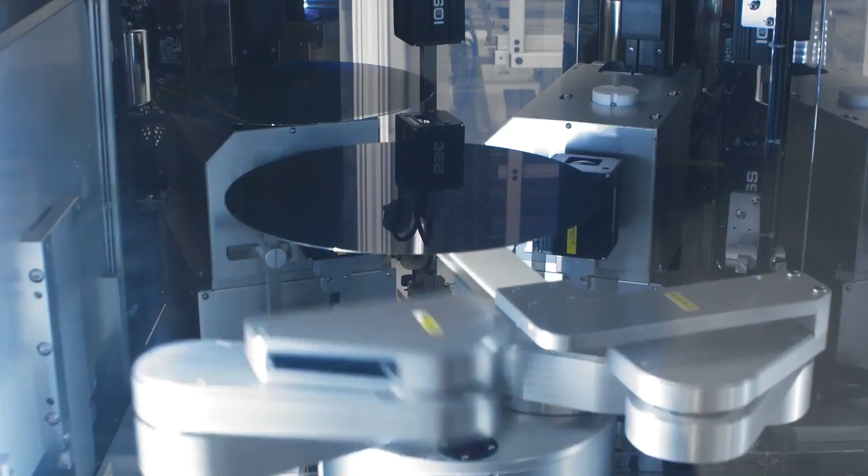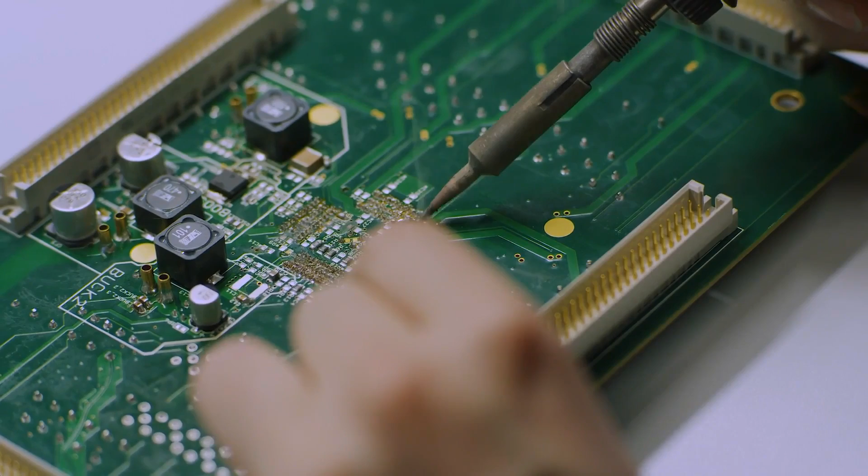Whatever the design, Infineon offers safe choice, easy design in, and reliable performance under various application conditions. We make these key requirements for our MOSFET product development. What does it take to ensure?

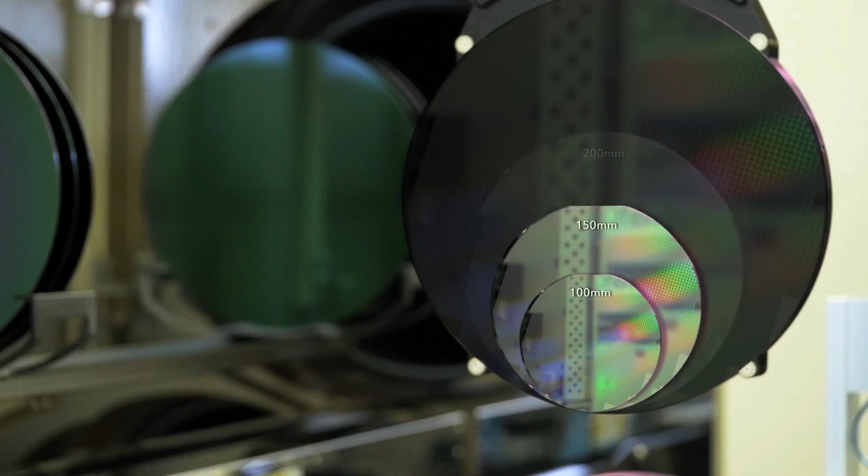Ease of use and easy to design in are key features for the customer, especially for the customers of the mass market, because they do not want to optimize their design for a dedicated MOSFET. We at Infineon have a long history in optimizing our FETs, especially to provide ease of use functionality. Either we do this by design or by the technology, or also by the package, and we see that we have meanwhile all the critical issues like overshoot and induced turn-on, which typically happens in applications, under control.

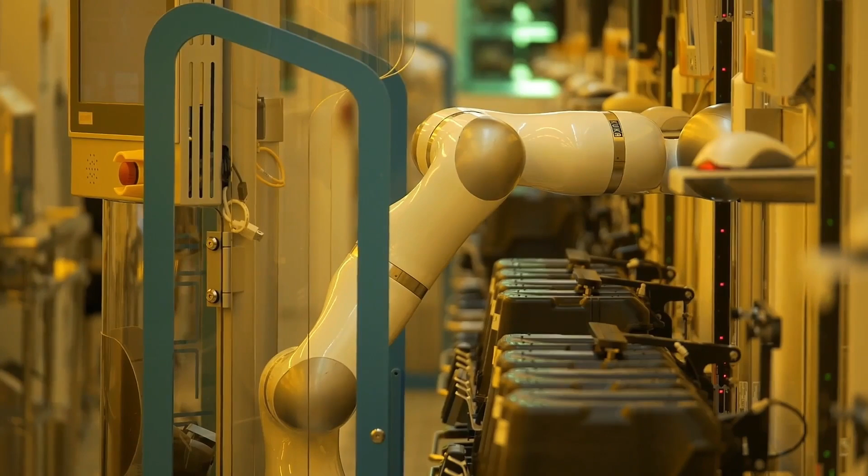As a trusted advisor, Infineon puts the success of its customers in the center of its product development. To ensure a competitive advantage for the customer, we need to differentiate with the MOSFET technology. Our MOSFETs are designed to operate at a very high switching frequency and at a very high current at the same time. So that means we provide a very high power density. And this gives the customer the ability to reduce the form factor and to have less cost in the application. We are part of today, and we are committed to remaining a part of tomorrow, also with our MOSFETs.

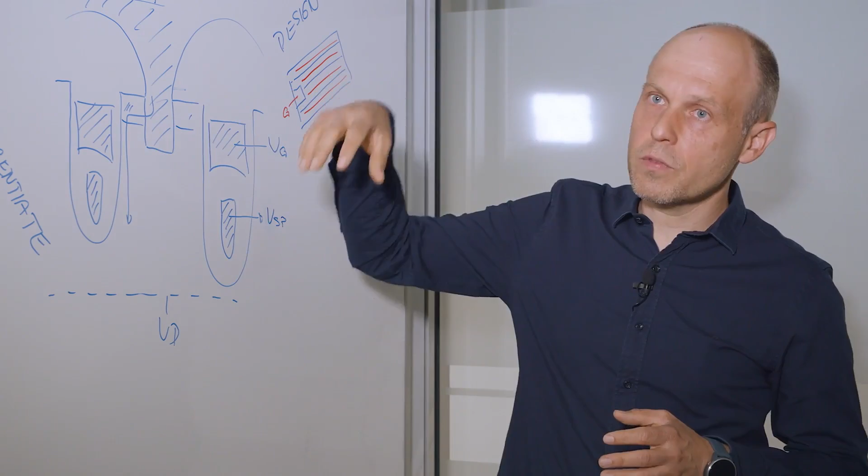So what does the future hold? Here I see two directions. The first direction goes towards another shrink. That means we go from lateral trench concept to harvesting into the third dimension. We also call it needle concept. And the other direction is go towards more integration. Provide additional features to the customer to differentiate, like a current sense, a temperature sense, or diodes. All in all, I see that our silicon MOSFET roadmap is very well stuffed.

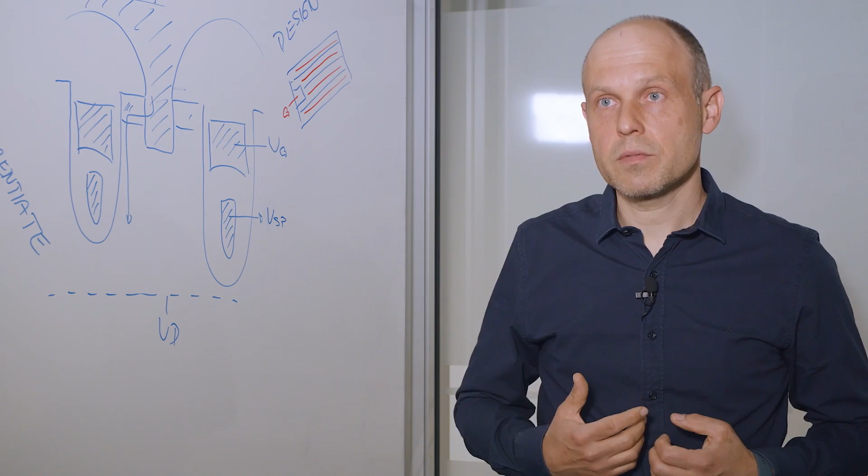Good evening to all. Myself, Shyam Kamal. And in today's discussion, I'm going to talk about arbitrary time stability and stabilization.

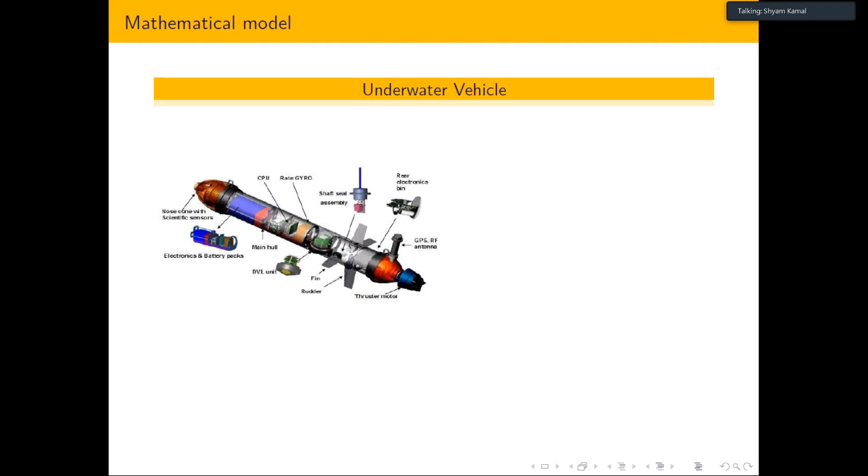Sometimes whenever we are trying to do something, the system is not available to us. Due to that reason, I need another platform that is called a mathematical platform. Mathematics gives us an abstract platform where we say this system can be represented by some mathematical equation. And that mathematical equation is simple from the control point of view. Obviously it should not be too simple.

So you can see here that I have an underwater vehicle. This is the physical system, and this is the abstract system. I am assuming that this underwater vehicle is moving in one direction, and I just have to control the velocity. I am not worrying about the position. What is our basic objective? I have to maintain some velocity Vd. Vd might be varying with respect to time or might be constant.

So I have a flow of water, and somewhere in between I have to stop the underwater vehicle, or we have to move the underwater vehicle with some specific velocity. This is the control objective. So I have written two problems, the tracking problem and the stabilization problem. Suppose in the flow I want to stop the underwater vehicle, meaning Vd equals 0, the velocity equals 0. That is called a stabilization problem.

Tracking means I have some sinusoidal velocity or constant velocity that I have to track. It is possible to show that in error coordinates, the tracking problem is converted into a stabilization problem. Not always, only if the desired signal is differentiable. Here I have just applied Newton's law to model this system, because I only move in one direction. Obviously this is not true if I want to move in any arbitrary direction.

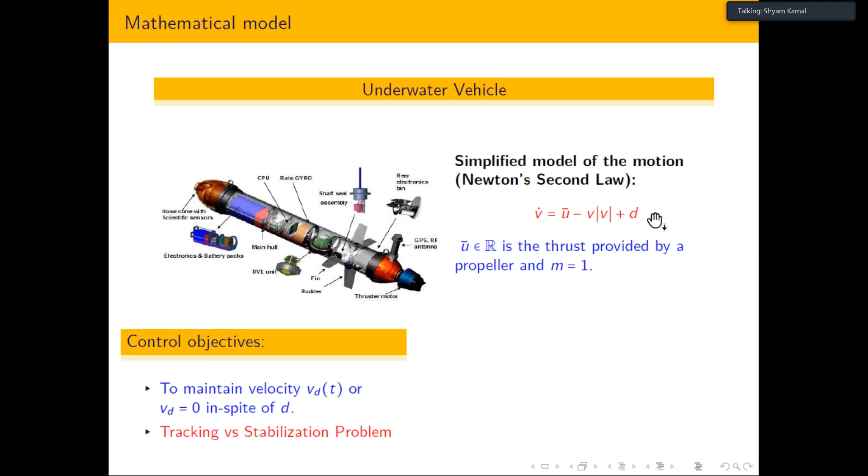And D is some uncertainty, because I cannot perfectly model any physical system. There is always some gap, and I have modeled that gap by D. What assumption do I have? The exact profile of D is not known to me, but I am assuming that D does not go beyond some maximum range. That is called the deterministic framework, and in that framework we are working.

If you see carefully, this system is a first order system in the velocity coordinate, and it is a non-linear system because V mod V is involved. Whenever I have a linear system, I have well-defined design tools. I can talk about rise time, settling time, or in the frequency domain, where the open loop or closed loop transfer function lies. But whenever we have a non-linear system, I cannot distinguish between transient and steady state response.

Due to that reason, I need some kind of qualitative behavior. I cannot talk about quantitative behavior. In case of linear systems, you can talk about quantitative behavior, meaning rise time, settling time, or these kind of things. That qualitative behavior is stability, accuracy, speed of response, robustness, and cost. In this lecture, I am going to cover these points: stability, accuracy and speed of response, and robustness.

Okay, so let us start with stability. Whenever I want to understand the concept of stability, those working on linear and nonlinear systems might have seen that whenever we talk about stability of linear systems, we use the bounded input, bounded output framework. But whenever we go for nonlinear systems, we talk about some other framework, either the ISS framework, input to state stability framework, or some kind of Lyapunov framework.

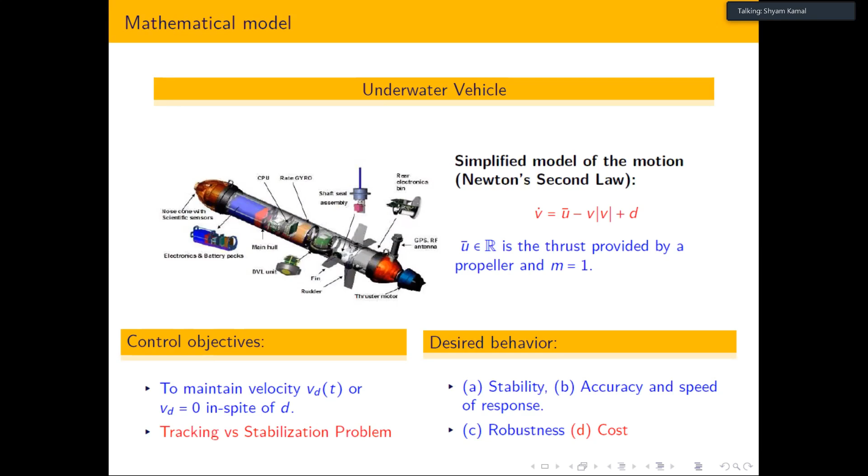So try to understand how basically that framework comes into picture. For that we have to understand why calculus works. First we have to understand how basically calculus is developed. If you see calculus, it is not a new subject. This is one kind of fancy linear algebra, you can tell. During school time, we have already explored linear algebra.

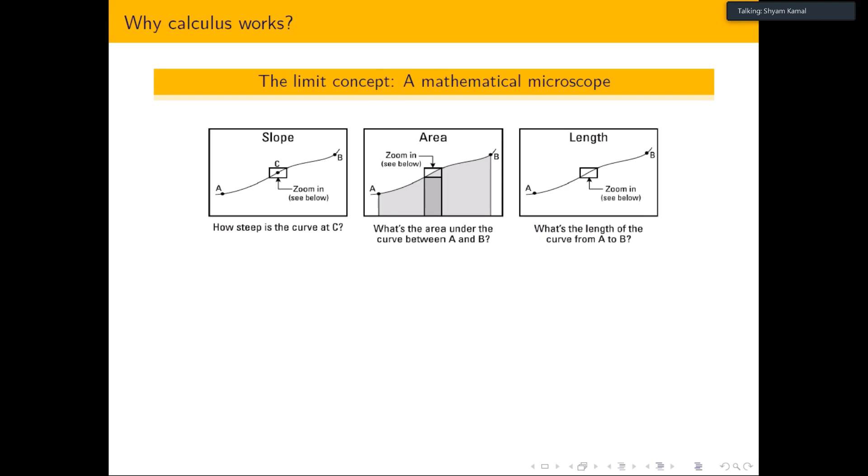So what basically we are doing: suppose I have some kind of slope that is constant slope, so I can calculate the constant slope by dividing the vertical height and the base. But here my problem is a little more difficult. The problem is that this slope is now no longer constant, it is varying every time. So now the question comes: how to calculate the slope?

Similar question here: if I have some kind of rectangle and triangle, then I can calculate the area. But suppose I have some kind of region which is actually varying from point A to B. Then how to calculate the area? And similar story about the length too.

So what is the suggestion of Leibniz or Newton? Actually it is debatable who has developed calculus, so I am not going into that prospect. I am just telling, suppose I assume calculus is developed by Newton, what actually Newton thought was that I have to apply linear algebra. So how to apply linear algebra? He was telling you can go to some point.

Suppose I am at this point C. Now you can apply some kind of microscope, and what you can do is start zooming. So if you do infinite zoom, then what happens? This becomes a straight line. And once this becomes a straight line, then you can apply linear algebra.

Similarly here, he was telling you can apply the microscope again, and using the microscope you start zooming. So if I zoom here at this particular point, then you can see that again the area is nothing but the addition of rectangle and triangle. So what I mean to say is that calculus is not a new subject, just some kind of fancy linear algebra, where one operation we have to understand, that is how to do zoom.

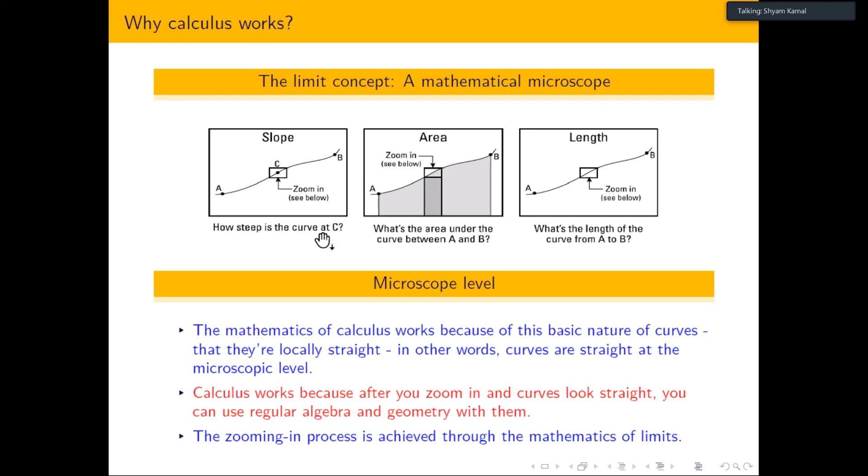Zooming is nothing but a mathematical microscope here. So I have to define the meaning of mathematical microscope, and for that Newton developed one concept called the concept of limit. If you see the concept of limit, it is exactly in the same way. First you see the definition, and after that we try to understand it. He is telling that suppose x is some independent variable and f(x) is the dependent variable, meaning you can interpret x as input and f(x) as output. So he was telling that as x tends towards a, if limit L exists, then for every epsilon there exists a delta such that this condition will satisfy. So if you read this definition, for engineers this definition is quite complicated.

In first reading, you may not understand why all this is written here, why it exists, but try to understand from a microscopic point of view. What is the basic idea? Calculus is nothing but some kind of fancy subject, so you have to do zooming. If you have to see a limit, you have to zoom here, stretch the curve here. And if you zoom, you can see that this point L is shifted from plus epsilon to minus epsilon. So now you can do any zoom, and due to that reason, this inverted A is called 'for all'.

And if limit exists, then there exists an independent variable L, and that is going to lie in some range delta. So corresponding to epsilon, since epsilon is independent, you can select any kind of zoom. So if you zoom the dependent variable, you get some kind of zooming of the independent variable. First you zoom the dependent variable, and if you get some kind of bounded region, then I can tell that there exists a limit. This absolute value means distance between this side and that side.

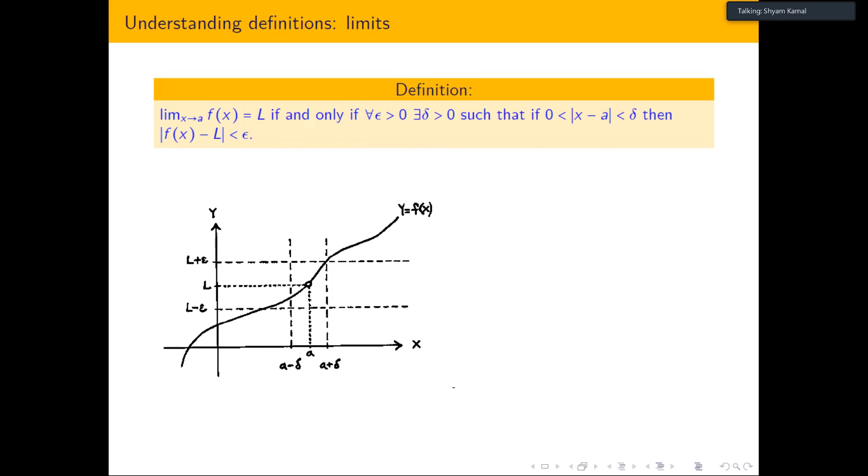It means you can now interpret something as a machine - you give some input and you get some kind of output. If this definition exists, it means that if I give bounded input locally, I will get bounded output locally. That is the meaning. Due to that reason, the stability definition is exactly the same, and due to that reason I have written here, continuity to stability.

So what they are telling is that I have some kind of system, and I have taken that system as x dot equal to f(x). Whenever you have a forced system, you have already designed some kind of control, and I am assuming initially that control is not a function of time. When control is a function of time, I will also give interpretation for that - only one more channel will increase in that case. So if you solve it, you can see the solution of this autonomous system - there is no extra variable, extra quantity involved here. So if you give initial condition to this system, you are going to get x(t).

So the definition of stability: for every epsilon, there exists a delta, exactly like the previous one. Here I am assuming that for the equilibrium point, x dot equal to f(x) is x equal to 0 is the equilibrium point. So a similar kind of definition - this kind of definition is adopted by Lyapunov, and this is called Lyapunov stability. So somehow Lyapunov stability is just the generalization of bounded input, bounded output, about the equilibrium point. That is the kind of message I want to transmit here.

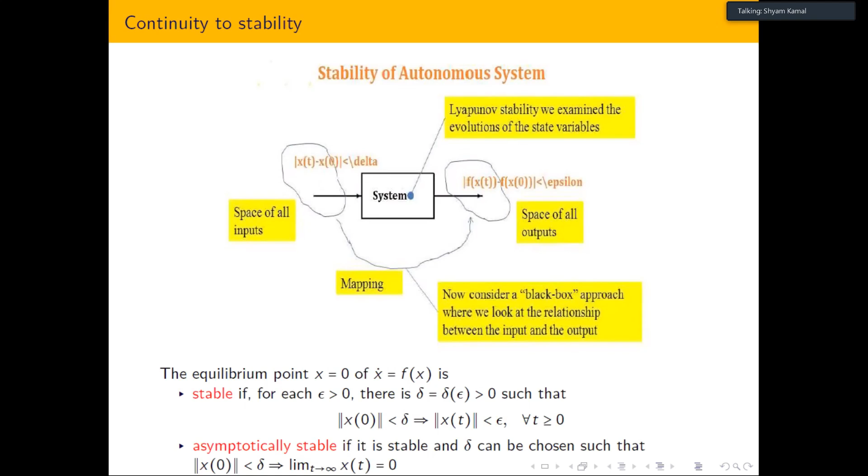Now let us come to the control part. I will also give another interpretation using Newton's law of how to understand stability. So one way, just by zooming, you can understand the notion of stability. Now what is the meaning of control? I have already told you that whenever I have some objective, I have to fulfill that objective. So how to fulfill that objective? I will see the current output and whatever objective I have to fulfill, and after that I will define the error between these two. Now what is our aim? I have to minimize that error.

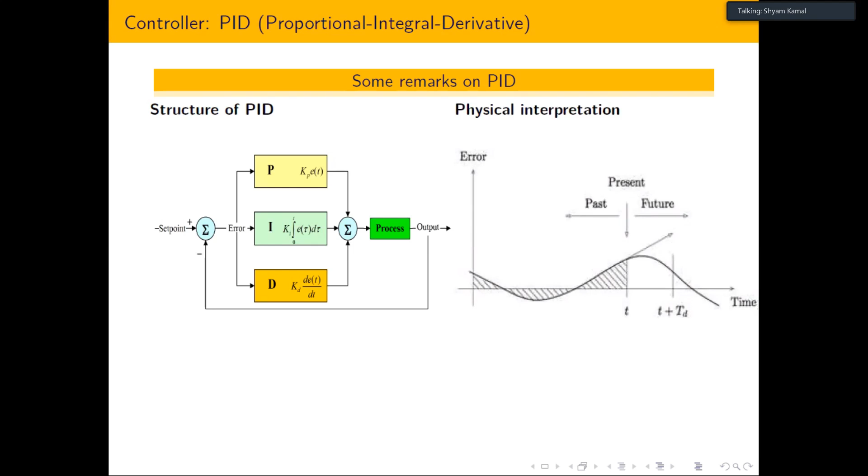Okay, so I have to nullify that error. Try to understand that I have some process, some kind of output, and some kind of set point. If the set point is 0, that is a stabilization problem. But suppose I have to track VD, then VD is the set point and V is the output of that particular underwater system. So what I am going to do is calculate the error.

And after that, you can see that in a PID controller we have listed 3 blocks. Let us try to understand the interpretation. Why only 3 blocks? Why not 4? Why not 2? So if you see our decision process, actually control system is fully motivated by our intuition.

Whenever I have some kind of situation and I have to take a decision, how basically are we taking that decision? We are seeing the present instant, the past, and the future instant. Based on the combination of present, past, and future, we are taking the decision. So similarly, here the machine is taking whatever we developed, we try to implement the same kind of methodology to the machine also. For that, we have used the idea of calculus.

So what calculus is telling us: I have some kind of error signal evolved with respect to time. The present error is represented by E. So I have scaled out that error, and after that we are actually supplying it to the system and telling the system to suppress this error.

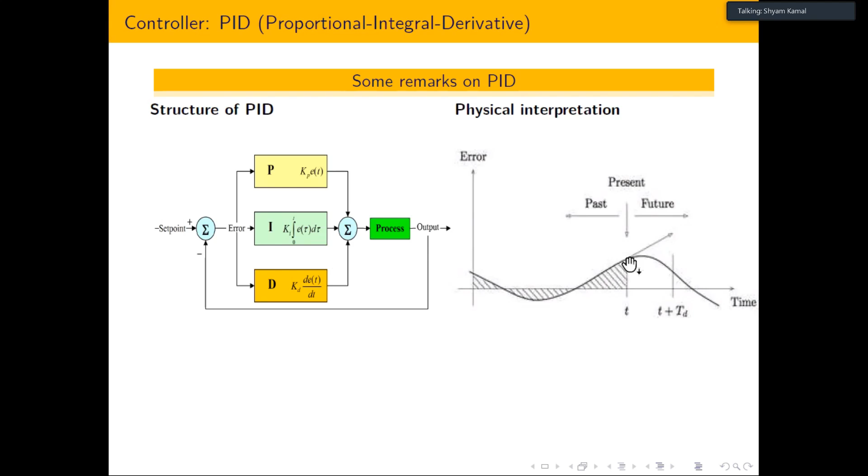Similarly, now our decision might be a function of the future, and due to that reason, you can see that future is nothing but the slope at this point. So basically, if you see the PID controller, that is nothing but 5 different things involved here: present, past, and future. Time is involved here, and after that, gains are involved.

Based on these 5 pieces of information, we are basically designing the control. And based on my knowledge, if you talk about any kind of control system, that is maximum based on these 5 pieces of information only. Sometimes it might be based on 1 information and 1 gain, that is okay, but most of the time we are just using these 5 pieces of information. Due to that reason, I am interpreting that the PID controller is a universal controller.

You can think of it like this: whatever controller I am going to design, that is just a subset inside the PID controller. So any controller you design is nothing but some kind of PID controller only. The only difference is that for this proportional term, you might use some kind of nonlinear scaling. In case of this simple integral, you might use some kind of complicated integral. In form of this simple derivative, you might use some kind of different derivative. So all controllers are nothing but subsets.

So if you have information of everything, then obviously your controller is very, very good. But nowadays, if you see the system, most systems are actually working under uncertainty conditions. So I cannot assume that I have future information and past information in order to design the control, because if I rely on past information, and suppose if I work on a network control system, some hacker will hack my information and change it. So our control itself will destroy our process.

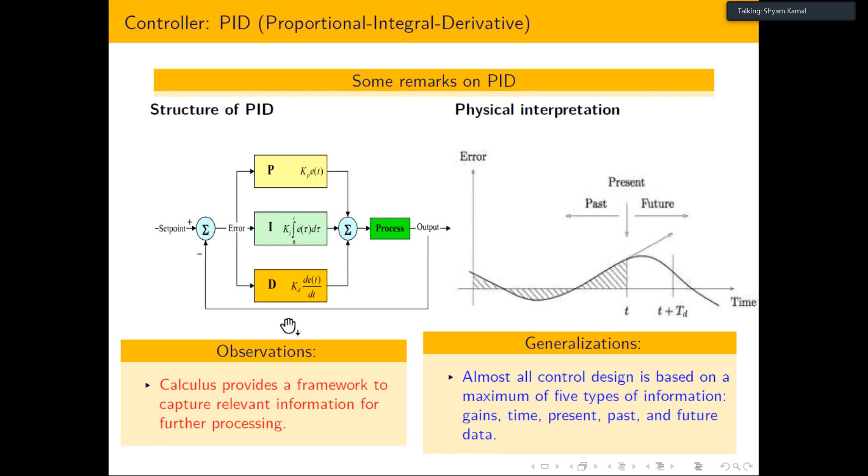So this is the brief overview of the PID controller and how basically the PID controller performs well, because we have all information, you can see. And due to that reason, the PID controller is simple, and if you are able to tune the gains, the PID controller most of the time gives you very, very good results. Okay, but what is the difficulty? I don't know the gains. I don't know the exact process. Okay, so if some process is running inside a closed room, what is my suggestion? You can use the PID controller.

Okay, let us try to understand now using this proportional information what is the meaning of equilibrium point, what is the meaning of asymptotic stability, what is the meaning of stability. Okay, so what I have done initially, if you remember the first slide, where I have taken the information of the underwater vehicle, at that time I have V mod V as a drag force, and I know that whenever some underwater vehicle moves inside water, drag force comes into picture. So I am interpreting that as a feed forward control.

But I am telling that whenever I am going to design some kind of control, I am going to add it in advance, because I know some kind of uncertainty is generated by this. So if you design this kind of control, then your closed loop system now just looks like this. Okay, so now what is our goal? I have to design u such that I am able to maintain V equal to 0. I am going to solve a stabilization problem. Means I have to stop the underwater vehicle somewhere. Initially, I am assuming that I have still water. Means there is no disturbance, that kind of thing.

So if you don't have any disturbance, and if you have just information of the present, I can design this kind of feedback. This is called negative feedback. The negative symbol is here, and we are trying to understand why Kp is greater than 0. Okay, so if you see the closed loop system after substituting this control, that is given like this. Now initially I have some velocity, and what is our aim? I have to make velocity equal to 0. I have to stop. That is the basic idea of a stabilization problem.

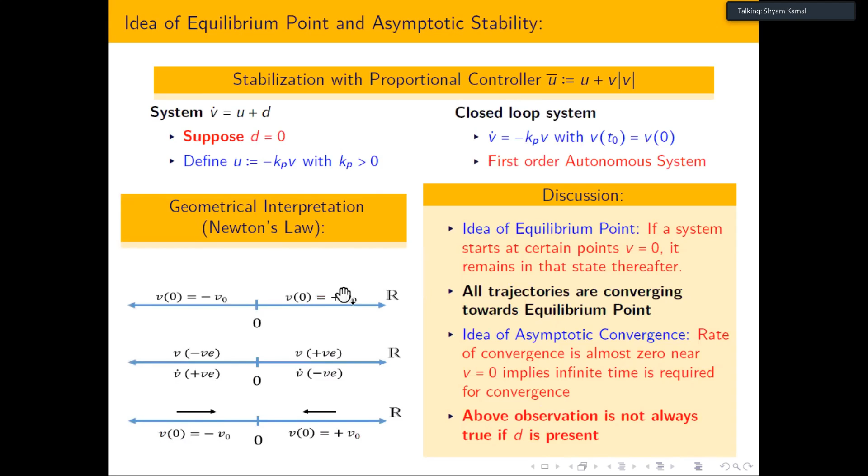So now you can see how to define stability: if you start near the equilibrium point, you are going to remain near it. Stability is nothing but boundedness of the state trajectory. What is the meaning of asymptotic convergence? You are not only going to remain inside this ball, you are also going to converge to zero. If I start from here, I remain inside some ball and then converge here. So asymptotic stability requires boundedness plus convergence to the origin. After that, what is the meaning of exponential stability?

I have bounded, but I have a rate of convergence, meaning exponentially fast speed, because whenever we are talking about asymptotic stability, we are not talking about a speed of convergence. But in case of exponential stability, we are also talking about the speed of convergence.

And due to this reason, if you see the literature, we first have the idea of an equilibrium point, because that is only one point in a space. If you start from that point, you are going to stay there. So that is a very, very unique point. Now what you can do about that point, you can check the behavior. So you are going to talk about stability, asymptotic stability, exponential stability.

For linear systems, everything is very, very simple. But for nonlinear systems, I can only talk about stability of the equilibrium point. I cannot talk about stability of the whole system, because it is possible I have more than one equilibrium point.

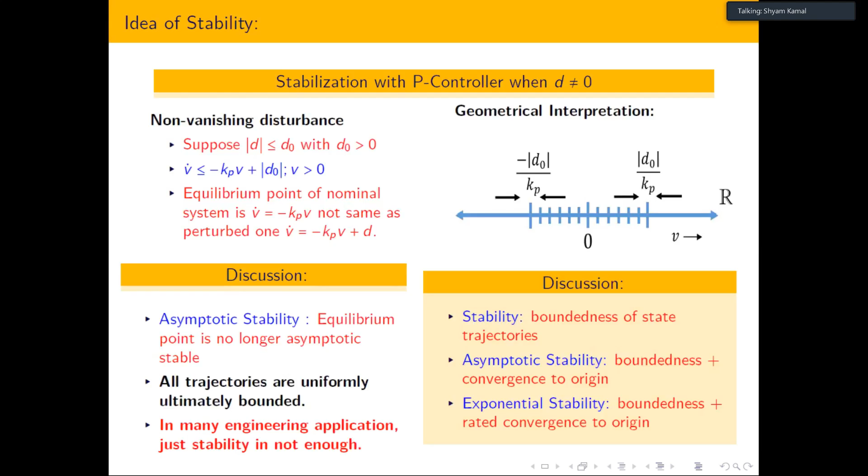Now you can perform the same experiment inside water. You can put this cart inside the water, and I am assuming that I have some kind of ground filled with water. So one more friction force starts acting, that is called viscous friction force, and its value is V squared. We have already seen that whenever an underwater vehicle moves inside water, that is V mod V. So either you can write V mod V or you can write V squared signum V.

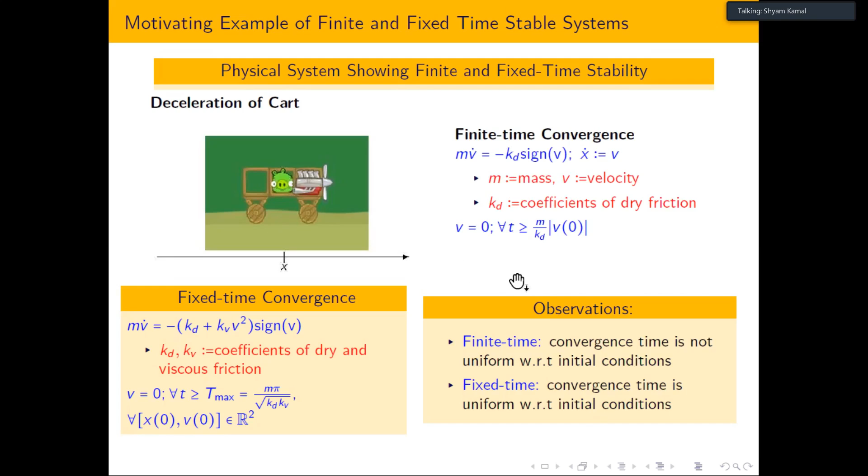So the observation is that convergence time is not uniform with respect to initial condition in finite time stability. In fixed time stability, convergence time is uniform with respect to initial condition. These two examples motivate new kinds of stability called finite time stability and fixed time stability. Suppose you have a first order system, and if you design control like this using the signum function, it is possible to show you will get finite time convergence. I will show this using Newton's law in the next slide.

Now, one question comes to mind: is it possible to create a differential equation where the time of convergence is independent of the system parameters as well as the velocity? Suppose that you have some kind of enemy, and you have some kind of defense system, and you want to hit this enemy.

So the enemy might possibly be located anywhere, but you have just a very short time to hit that enemy. So at that time, if your time of convergence is a function of a parameter or initial velocity, then you are not able to hit that. And due to that reason, I need another form of stability that is called arbitrary time stability or free will arbitrary time stability. It means that it is independent of the initial condition as well as the initial parameter.

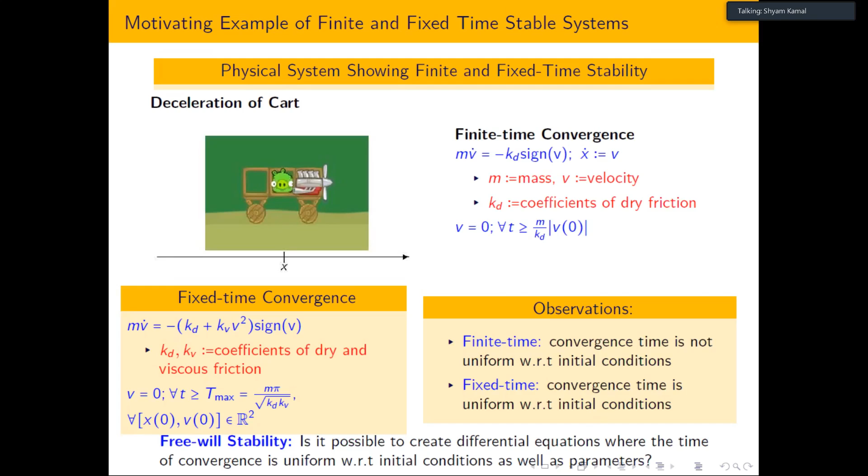Okay, so I have done some simulation in MATLAB. What I have done, I have taken a very, very simple system, x dot equal to u(t). After that, u(t) I have designed based on proportional information. u(t), I have just kept minus x(t). You can see that if I start with any initial condition, again, I am going to converge. And this is asymptotic here.

After that, I have updated my control like signum x(t). Okay, so it is possible to show that x(t) equal to 0 as t greater than or equal to mod x0. So if I start from 2, you can see that within 2 seconds, I'll end up here. If you start from 5, within 5 seconds, I'll end up here.

Okay, after that, again, I have actually done a more complicated control. And if I apply this kind of control, it is possible to show that if t greater than or equal to pi, it means that if I start with any initial condition, so t greater than or equal to pi, 3.14, so maximum 3.14 seconds I am going to converge. But I cannot tell exactly when I will converge, I can only give the upper bound. But what is the beauty of free will arbitrary time stabilization? You can specify the time.

You can see here that I have taken initial conditions 2 and 5, and I want to design some kind of control so that within 1 second, I can land on our target, land at x equal to 0. Okay. So it is possible to show that using both initial conditions, exactly at the same time, I can land. But you can see that the control algorithm is more complicated, and that is also depending on the time. Okay. So basically, this is time varying control. Our whole system is a non-autonomous system. Okay. So this is a comparison of the 4 different kinds of stability.

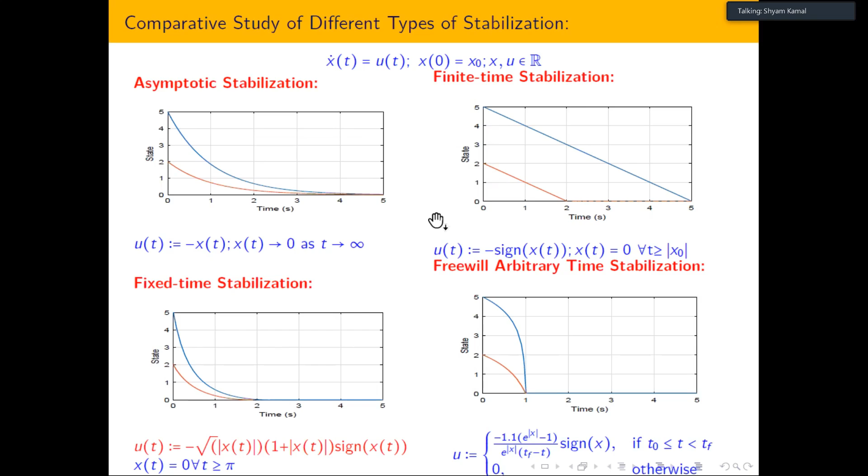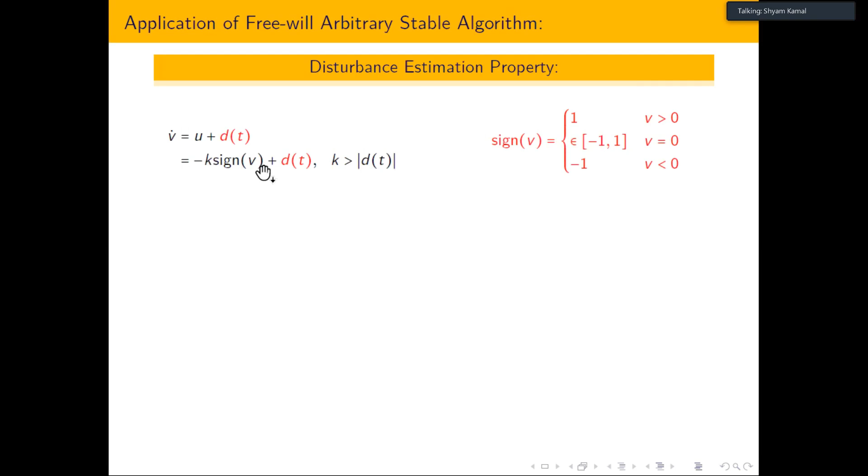Now let us try to see why this kind of stability is required. So again, I am going to take the example of the same system. I am assuming that I have applied control U bar such that whatever damping force is actually compensated. After that, this is my closed loop system. Now what I am going to do, I am going to understand the on-off control based on Newton's law. So the signum function, you can see that I have defined in a different way. What I am telling is that at V equal to 0, it lies from -1 to 1. So I am going to give you the intuition using Newton's idea only.

Okay, so let us try to see here again. If V greater than 0, I am assuming that V belongs to R. I have just one direction of velocity. So in place of X, please interpret here V. Okay, so what I am telling is that V, if that is positive, so V greater than 0 means +1. So I have some value of gain. And I have selected the gain greater than the maximum absolute value of the disturbance. So suppose the disturbance is lying between -10 to 10. So I have selected a gain that is greater than that.

So always if you see V greater than 0, V dot is some kind of constant value. Some constant value is going to be generated here. Okay. And due to that reason, the direction is in this direction, but the rate of change is also some number that is never very close to 0. Now you have to move from city A to city B. And if your velocity is finite, even if that is very small, in finite time you are able to move. So due to that reason, if you apply this kind of control, it is possible to show that you can move in finite time. Okay, same kind of information, V1 I have taken and d(t) sin t I have taken. So within finite time, I will converge here. Okay, after that, we have actually done one more simulation.

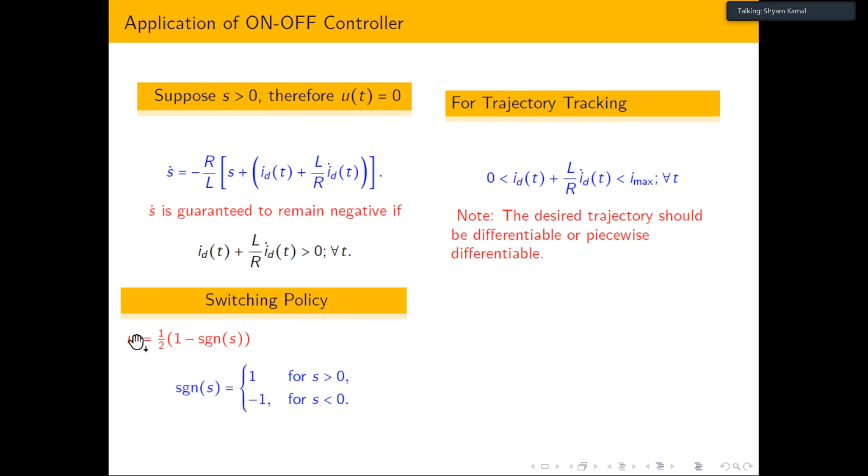So overall, if you maintain this kind of condition, I have to switch between these two, either plus or minus. So I have to design signum S, with S greater than 0 as plus 1 and S less than 0 as minus 1. So you can see here, if you put S greater than 0, 1 minus 1, so U equals 0. So if S is greater than 0, then U(t) equals 0. If S is less than 0, minus 1, that is plus 1.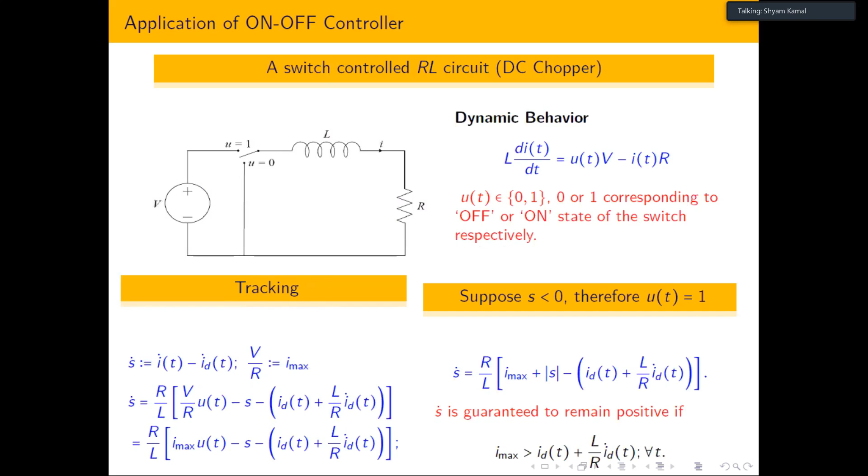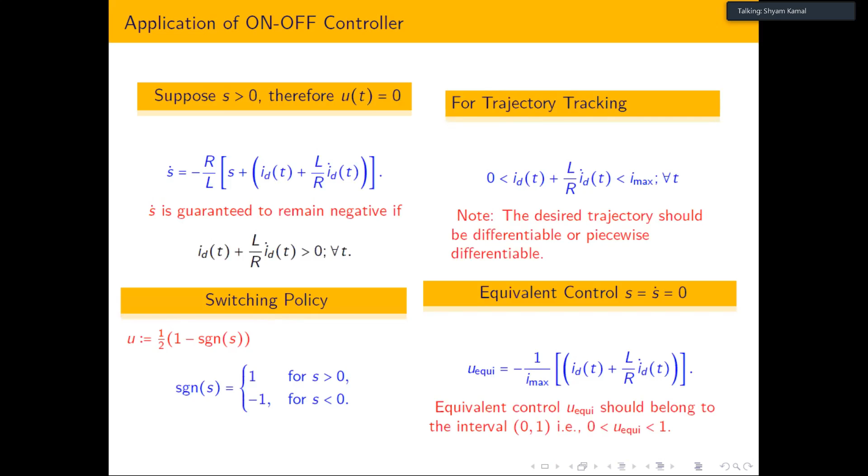In this way, whenever I have some kind of power electronics circuit, we only have to control the time of execution of this particular switch. By controlling this, I am able to maintain either a specific voltage or a specific current. So in this way, we are implementing sliding mode control or on-off control to the power electronics circuit. Similarly, you can implement free will also.

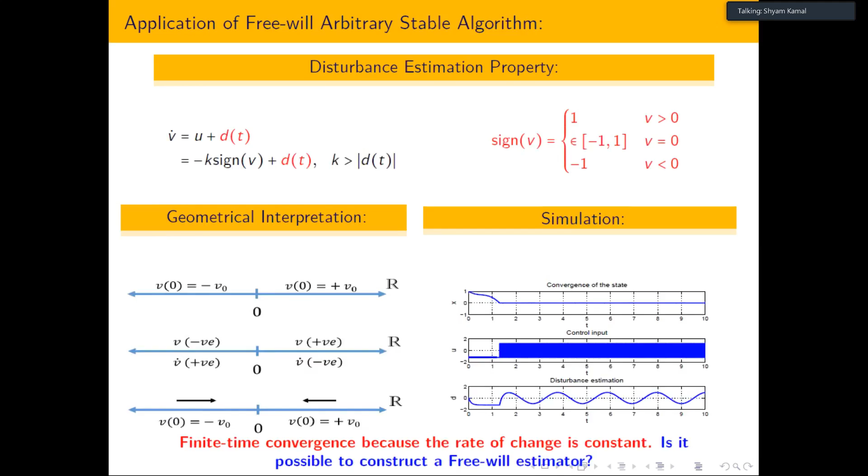Okay. Now, what we have seen in this slide is that if I have just on-off control, then I have to wait a long time to converge somewhere. I cannot control the time of convergence. But what is our goal? I want to control it arbitrarily. And due to that reason, now I am going to move towards a new definition.

So what I am saying is, during simulation we found that if the right-hand side is time varying, then I can talk about a class of systems whose convergence time can be tuned in any arbitrary way. Whatever control I am going to propose is a function of time, a function of x, and tau a you can specify. Whatever time of convergence you want, you can give inside the controller, and you have to give the gain part.

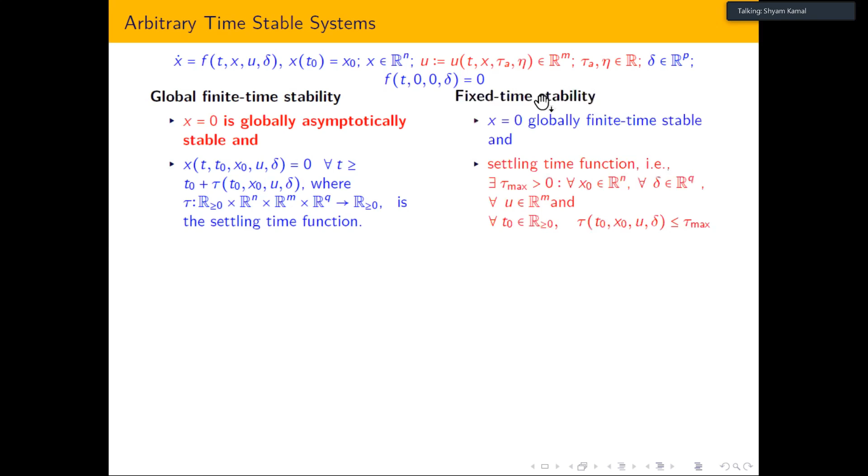And you have to make sure that this gain is greater than the order of the system. If you have a first order system, then this eta should be greater than 1. If a second order system, then greater than 2. Similar like that. So this is the definition of global finite time stability.

The meaning of global finite time stability is that x equal to 0 is asymptotically stable, and after that you have to maintain t. And here you can see that the time of convergence is a function of initial time, initial state, u and delta. But what is the meaning of free will arbitrary time? That you can tune tau a based on the convenience of your system. In fixed time stability, you can't tune your time of convergence. That is the limitation.

So this is the definition of free will arbitrary time stable. What we are saying is that the system is obviously fixed time stable. Fixed time stable means the time of convergence is upper bounded by tau max. And after that, tau A, whatever time of convergence you select, is independent of system parameters or any a priori known parameter. You just have to tune one parameter, even if you have an nth order system.

And if you are able to tune exactly, then that is called free will strong arbitrary time stable. Due to several implementation errors, sometimes we are not able to tune exactly, but it is in the vicinity of that, and due to that reason tau A is greater than or equal to tau TF. So this is called prescribed time and this is called predefined time. So arbitrary time stability is actually a collection of both.

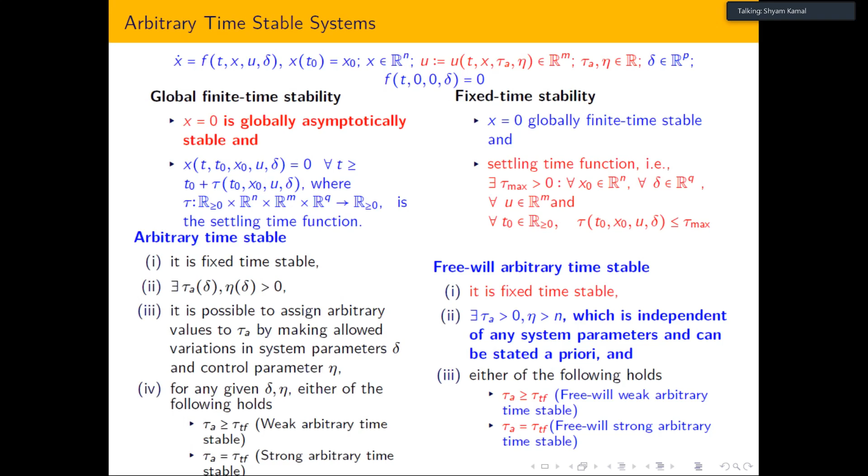Okay, but this free will arbitrary time definition is extended for the whole domain. That is the difference in these two concepts. So this is about whenever you are developing some kind of theory, you have to give some kind of name. So that kind of name I have given, so don't worry about that.

Let us come to one very, very simple case, because how basically one can develop a theory is if you are able to understand it for a scalar case. Using that scalar case, you can generate the Lyapunov stability, because a Lyapunov function is actually a mapping from Rn to R. So just a one dimensional result gives you the whole idea of an n-dimensional result. So that kind of thing I'm going to show you here.

So what I'm telling is that if you have this kind of system, when T is lying between T0 and Tf, and when T is tending towards Tf, at that time you have to switch to 0, if there is no disturbance. If there is disturbance, then you have to switch to some non-zero value that I will design.

Now you can see that if I solve this equation, then this kind of solution is there. As T tends towards Tf, this part is 0 and ln of 1, so log 1 equal to 0. Due to that reason, x is 0, and it is possible to show that as x tends towards 0, e power x minus 1 is also 0. So x dot also equal to 0. So as T tends towards Tf, it is possible to show that x is 0 and x dot is 0.

So by seeing this term, it looks like it might be unbounded because T is tending towards Tf, but that is not the case. This is a 0 by 0 limit form, and it is possible to show that it is always bounded. When we design this kind of controller, one question that obviously comes to mind is whether this controller is bounded or not, because that is a crucial requirement of any controller. So it is possible to show that it is always bounded.

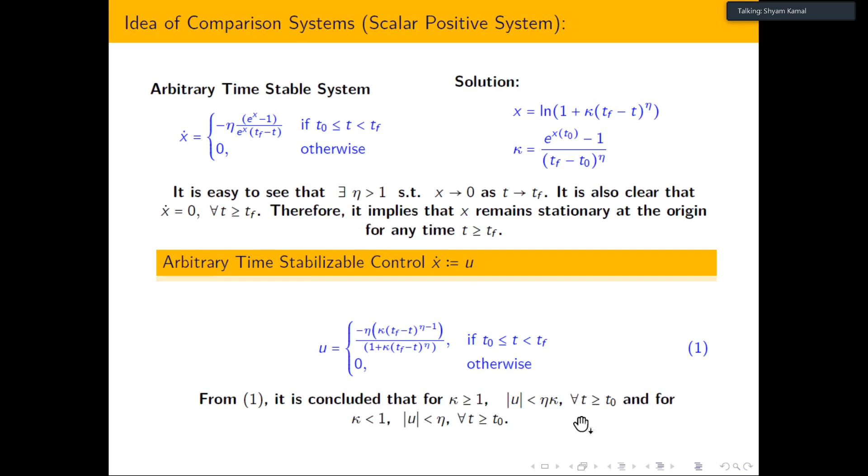Now, this result is only true for a scalar case, but suppose I have an nth order system. How do we actually generalize that result? So again, I have taken the help of Lyapunov theory. What Lyapunov theory is telling us is, suppose you have an n-dimensional system, and what I am going to define is some kind of energy-like function.

This energy-like function is a mapping from Rn to R. So I am telling that I can define some kind of Lyapunov function, and if it satisfies this kind of criteria, then you can see that finally this is nothing but the same kind of differential equation as the scalar case. It is possible to show this; detailed proof is available in the Automatica paper, please go through that, those who are interested. It is possible to show now V equal to 0.

So in this way, using a scalar case, you can design the Lyapunov stability for free will arbitrary time stability, or arbitrary time stability. If you get this kind of result, then that is strong arbitrary time stable. If less than or equal to, then that is called weak arbitrary time stable. In all practical applications, we are getting weak arbitrary time stability.

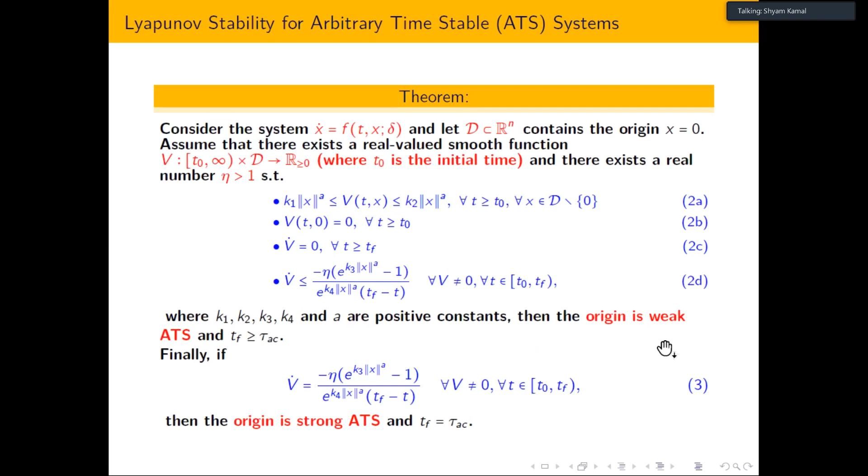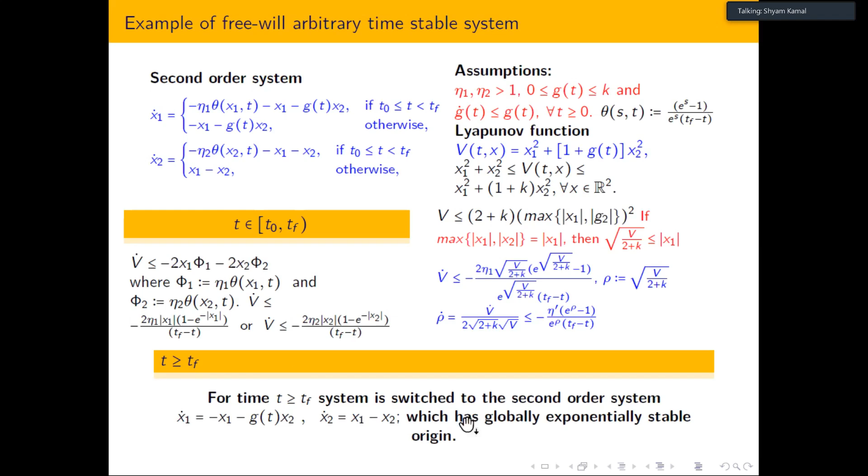So that kind of things we have shown here. Now let us consider what we have seen: suppose I have some kind of disturbance, and that disturbance is bounded.

Using sliding mode control, I can show that in finite time I can compensate the disturbance. But I have already told you that whenever designing some kind of disturbance observer, I required some kind of free will kind of stability, and due to that reason, I have switched like this.

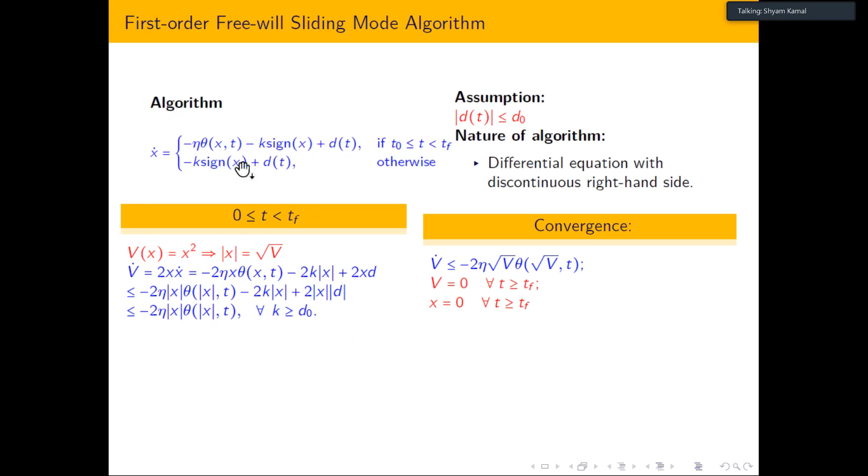By Lyapunov method, it is possible to show that within finite time you get a similar differential equation, and by designing this kind of control strategy, within fixed time you are able to converge. Within prescribed time, whatever arbitrary time you specify, you are able to converge to the equilibrium point. Obviously, when your goal is to converge in arbitrary time, your controller is complete.

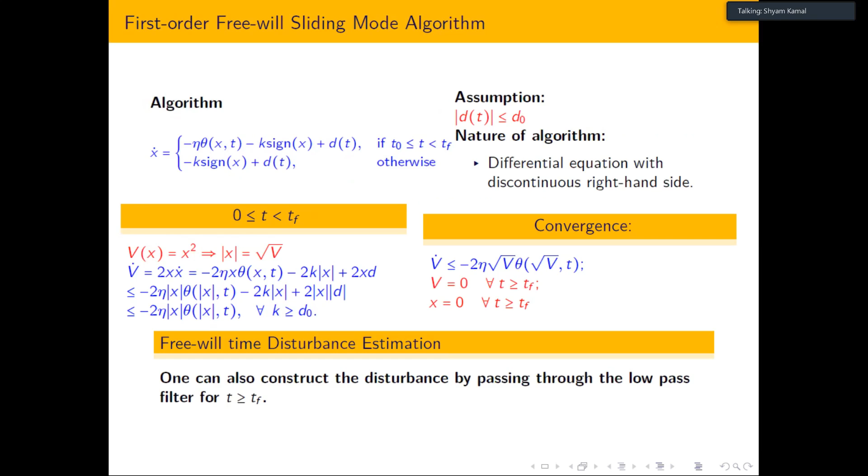Now this is a story about the first order system. Suppose you see several practical systems that are of second order. Some people here are working on robotics, controlling the motor, and using control of the motor they try to control the robot.

Here the actuator is nothing but an electrical actuator, that is a motor, a DC motor. If you see the basic principle of DC motor—I hope you're all familiar, but for the fresher people I have written it here—an electric motor is able to convert electrical energy into mechanical energy, and this is the principle.

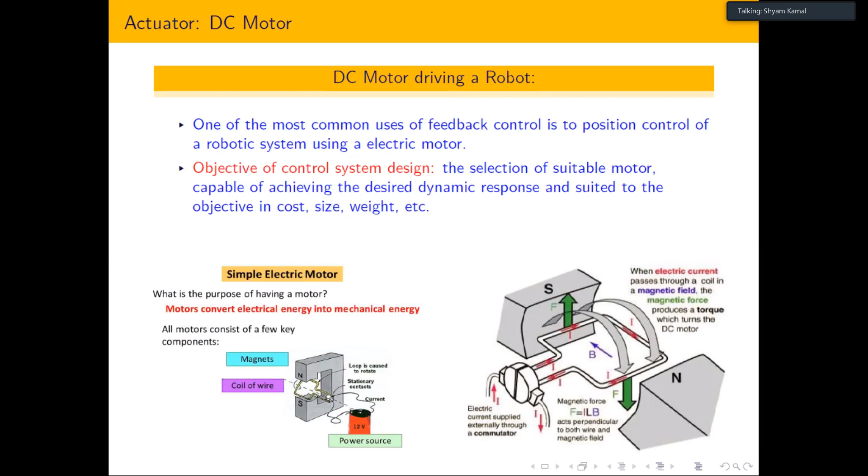So what I'm going to do is skip this. Whenever I have to design some kind of controller, I have already told you that you have to get some kind of mathematical model. So in order to get the mathematical model, what happens?

You have two different choices. Either you develop a very complicated model that will capture a lot of dynamics, or you go another way: capture simple dynamics, and after that apply some kind of robust controller.

Robust controller means that kind of controller where, if uncertainty is there and I don't know the uncertainty but it is bounded, it will give similar performance as when I have exact knowledge of the uncertainty or exact knowledge of the system. That is called a robust controller.

Since my controller is robust, I can make several kinds of modifications during the mathematical modeling and apply several kinds of assumptions. By that kind of assumption, it is possible to show that I can model this DC motor. The DC motor is used because I have to control the robot, so I have to generate some kind of...

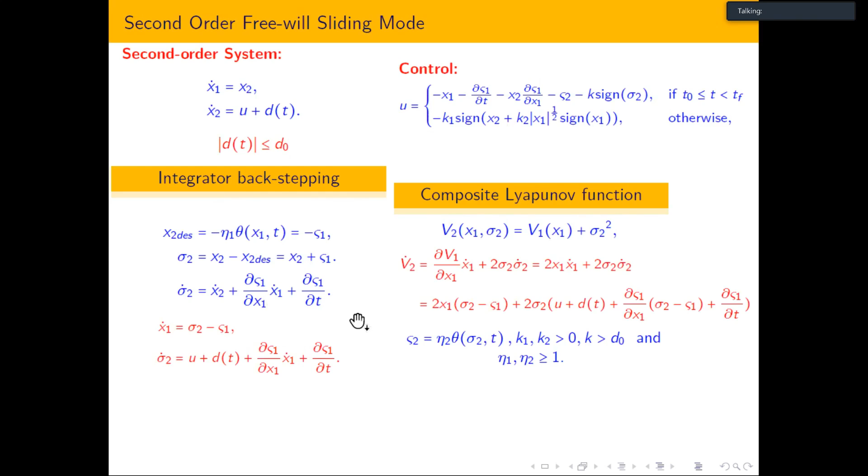It is possible to show by Lyapunov analysis, using whatever Lyapunov function I have generated, that x1 and x2 go to 0 in any predefined time, whatever time you can set here. So that is the story.

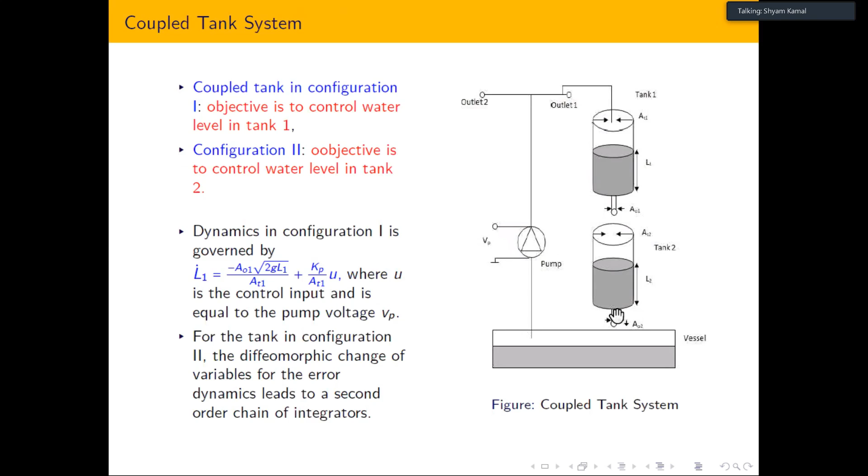Same kind of things I have shown in simulation, and I have also implemented that on a coupled tank system. The coupled tank system has two configurations. In the first configuration, I have to control just the water inside the first tank, and in the second configuration, by controlling the water in the first tank or controlling this pump, I have to control the water in both tanks, and it is possible to show that within 50 seconds I can do that.

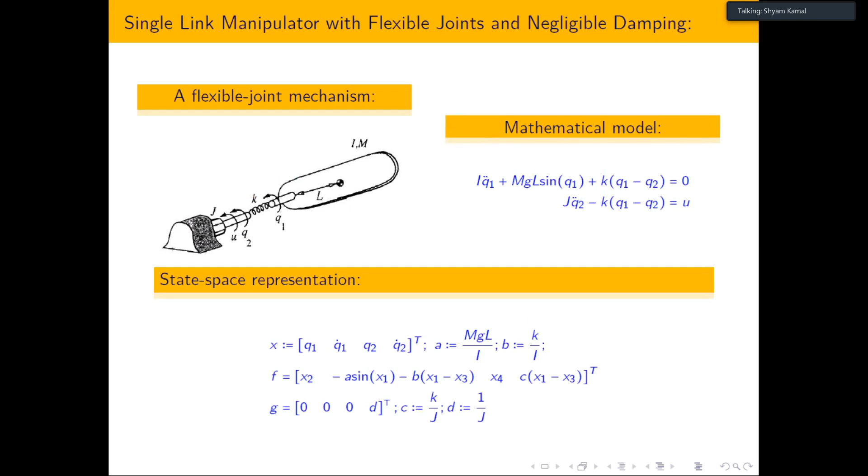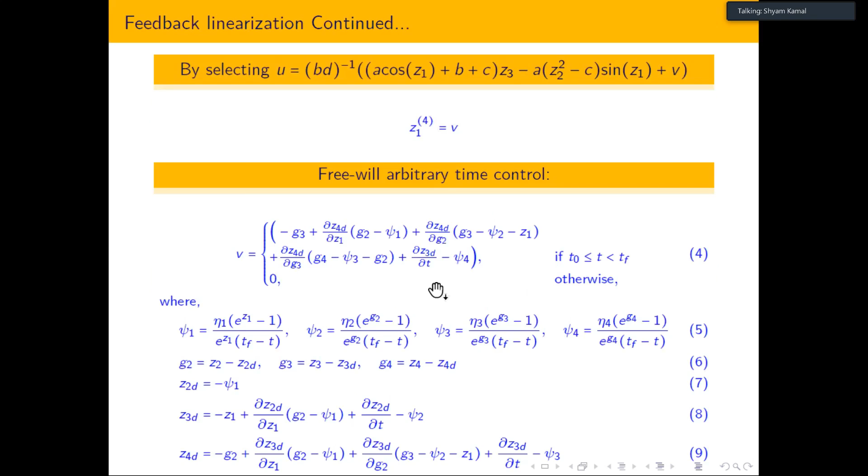This is the example of the robotic manipulator, which I have implemented. This is a fourth order system. Again I have designed this kind of free will arbitrary time stable control, and it is possible to show that I can maintain Z1, Z2, Z3, Z4 equal to 0 within 6 seconds.

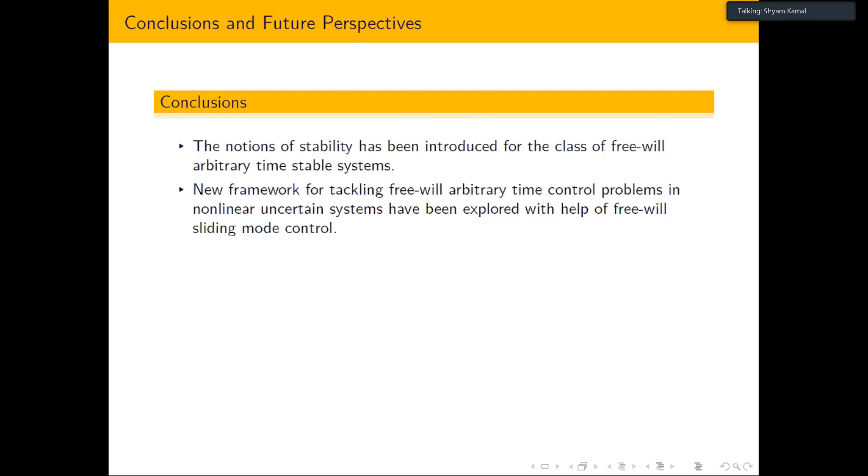So now it is time to conclude my talk. In this talk, I started from the fundamental notion of stability. We reviewed the basic idea of calculus, and using the help of calculus, we tried to understand the notion of stability.

And after that, we have seen all different forms of stability. And after that, what we have done, we have also extended this result for the uncertain time system with the help of on-off control or sliding mode control.

Now what I have to do is apply this kind of result for several classes of practical systems. But in this particular presentation, I haven't shown you any physical implementation. So I have done just implementation on a two-tank system or some simple setup. But still, this kind of implementation is open for some kind of power electronic system and a lot of different classes of system.

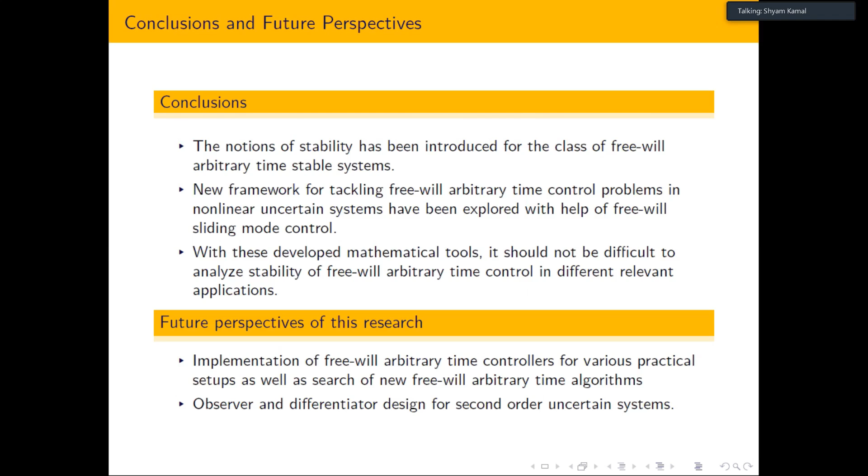And obviously, observer and differentiator design for second order or higher order systems based on this concept is recently reflected in literature. So you can apply that kind of result for several power electronic systems.